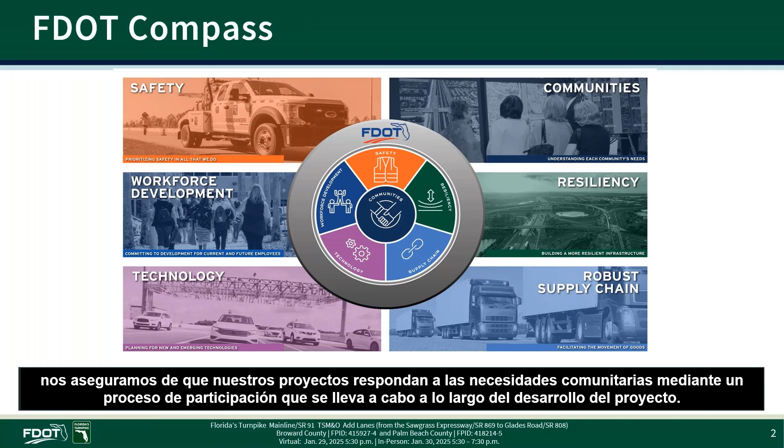This project is being developed in accordance with the Civil Rights Act of 1964. Under Title VI of the Civil Rights Act, public participation is solicited without regard to race, color, national origin, age, sex, religion, disability, or family status. If you have any questions or concerns, please contact Desiree Stills at 407-264-3111 or Stefan Kolakowski at 850-414-4742.

This meeting will provide you with an opportunity to review project details, ask questions, and provide comments concerning the project. In this presentation, we will discuss the following: the project location, project development process, proposed design, construction, project schedule, and submitting questions or comments.

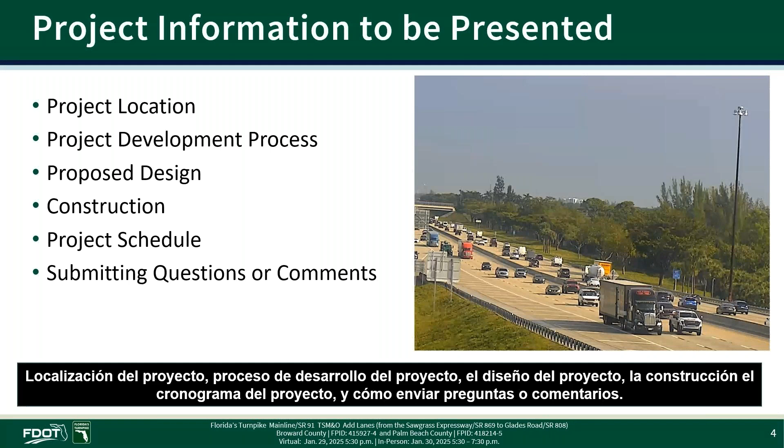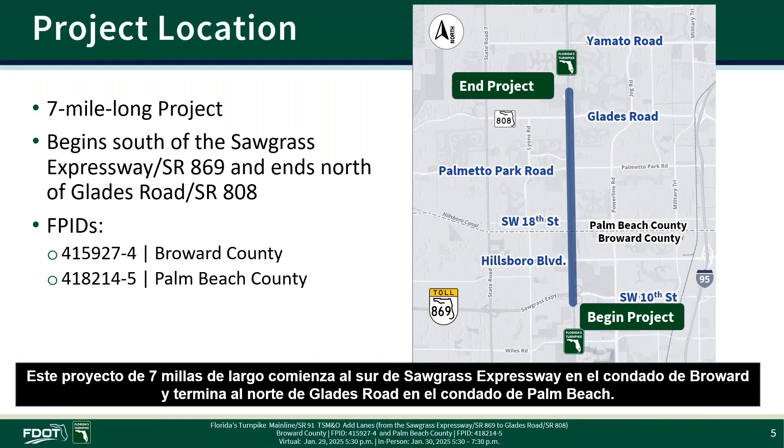This 7-mile-long project begins just south of the Sawgrass Expressway in Broward County and ends north of Glades Road in Palm Beach County. Florida's Turnpike Enterprise has assigned a financial project ID number for each county: 415927-4 for Broward County and 418214-5 for Palm Beach County.

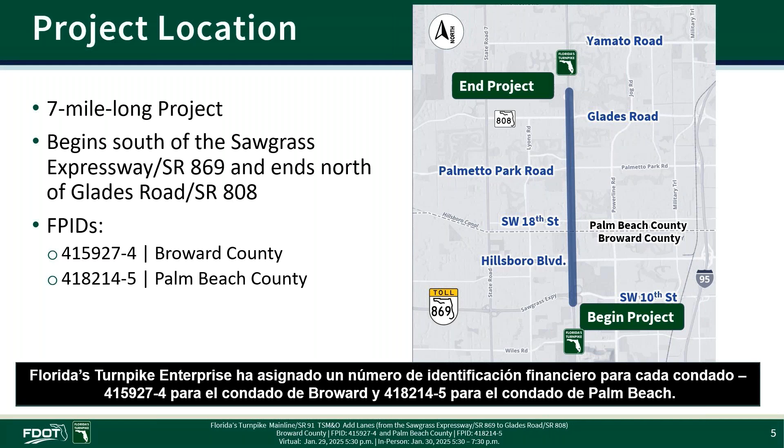This project is following the project development process. This process includes 5 phases, beginning with planning, project development and environment, or a PD&E study, final design, right-of-way acquisition, and finally, construction. The planning phase has been completed, as well as the PD&E study.

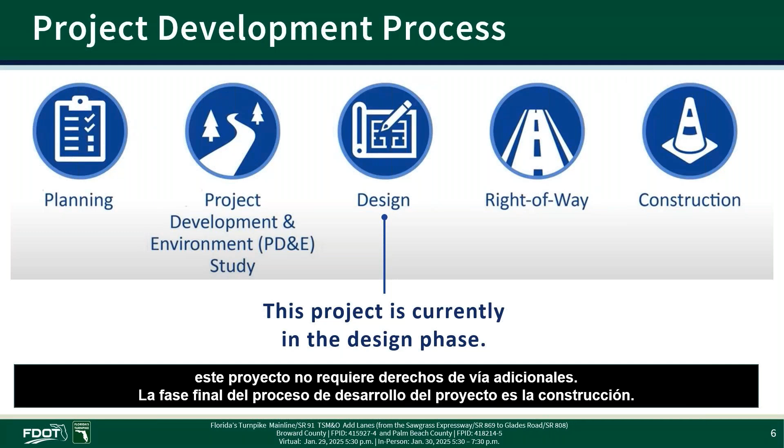Our project team is currently working to complete the design phase. The design phase is typically followed by right-of-way acquisition. However, this project requires no additional right-of-way. The final phase of the project development process is construction.

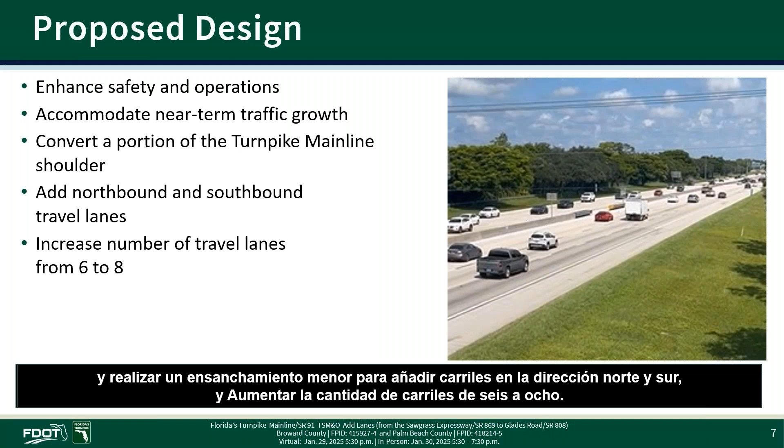The proposed project will enhance safety and operations, accommodate near-term traffic growth, convert a portion of the Turnpike Mainline shoulder to add northbound and southbound travel lanes, and increase the number of travel lanes from 6 to 8.

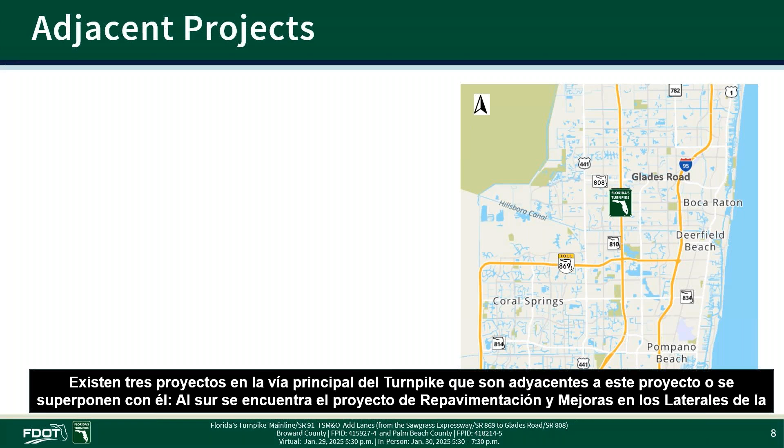There are 3 projects on the Turnpike Mainline that are adjacent to or overlap this project. To the south is the Turnpike Mainline Resurfacing and Roadside Improvements Project that is currently under construction, with limits from Pompano Beach Service Plaza to Sawgrass Expressway in Broward County.

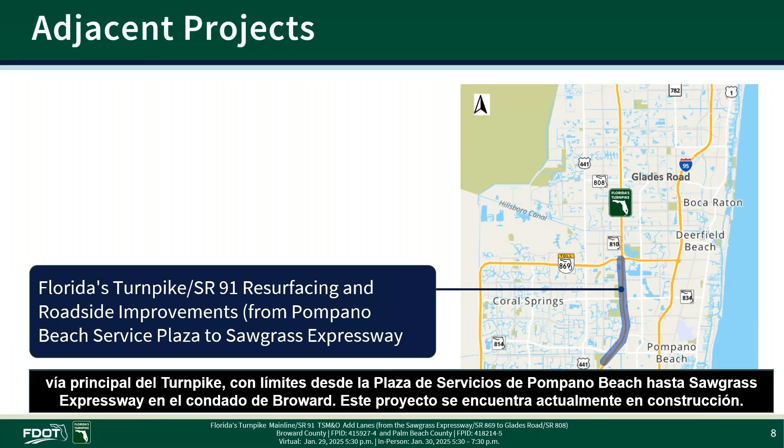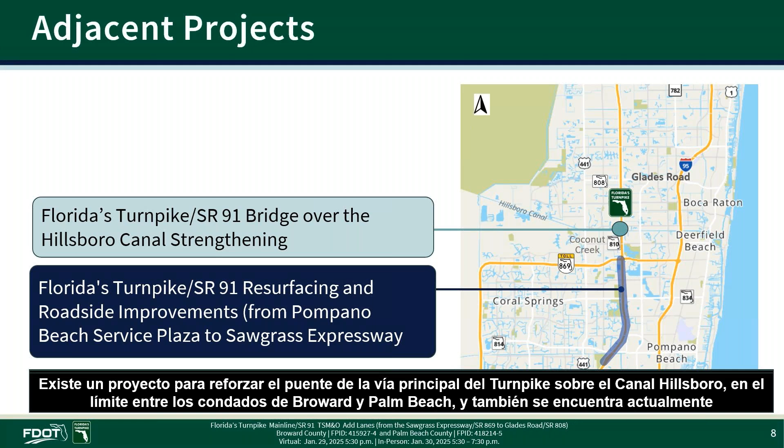A project to strengthen the Turnpike Mainline Bridge over the Hillsboro Canal at the Broward-Palm Beach County line is also currently under construction. And to the north, there is a project that is being designed to widen 3.5 miles of the Turnpike Mainline from north of Glades Road to the L-38 Canal in Palm Beach County.

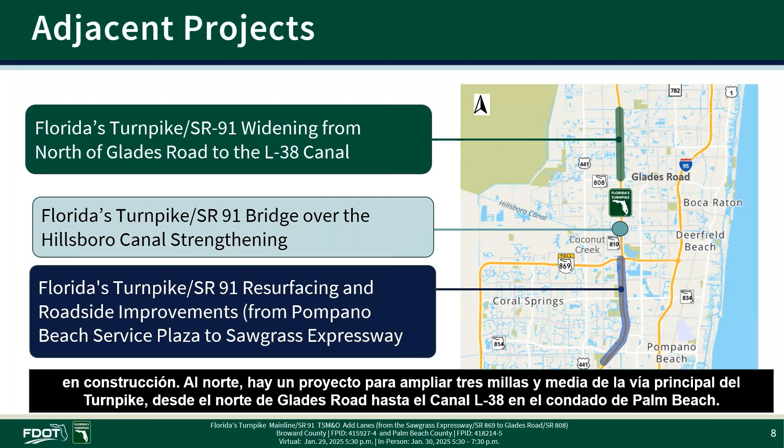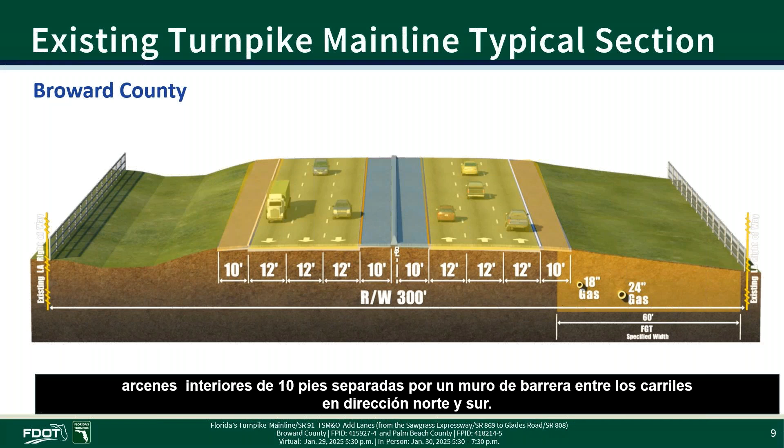Within the proposed project limits in Broward County, the existing Turnpike Mainline configuration consists of 6 12-foot travel lanes, 10-foot paved outside shoulders, and 10-foot inside shoulders with barrier wall separation between the northbound and southbound travel lanes. The Florida Gas Transmission, or FGT, has an easement running along the northbound right-of-way that includes 2 natural gas transmission pipelines.

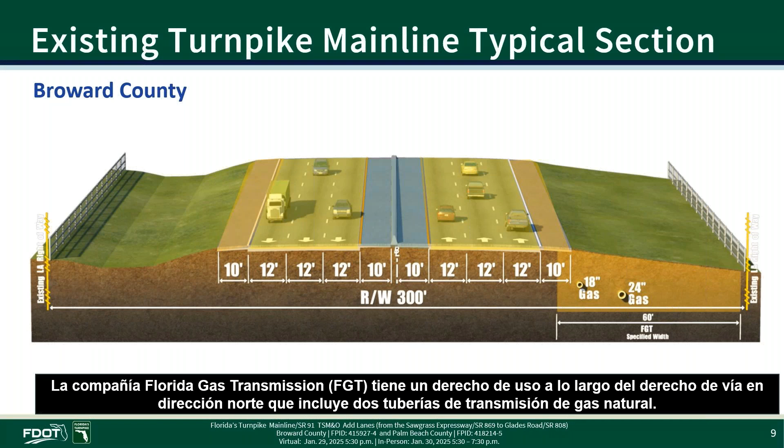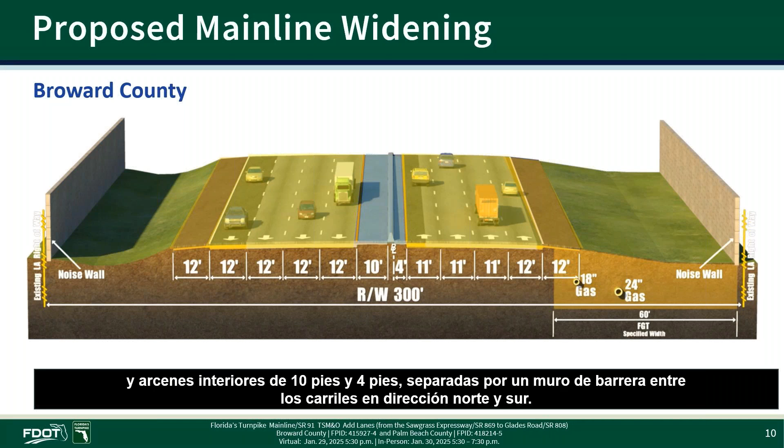The proposed configuration widens the Turnpike Mainline to the west and will consist of 8 lanes in total: 4 12-foot travel lanes on the southbound side, 3 11-foot and 1 12-foot travel lanes on the northbound side, along with 12-foot outside shoulders and 10-foot and 4-foot inside shoulders with a barrier wall separation between the northbound and southbound travel lanes.

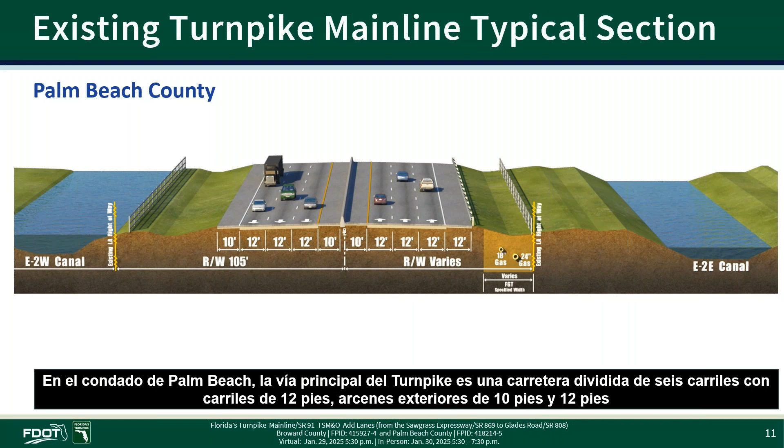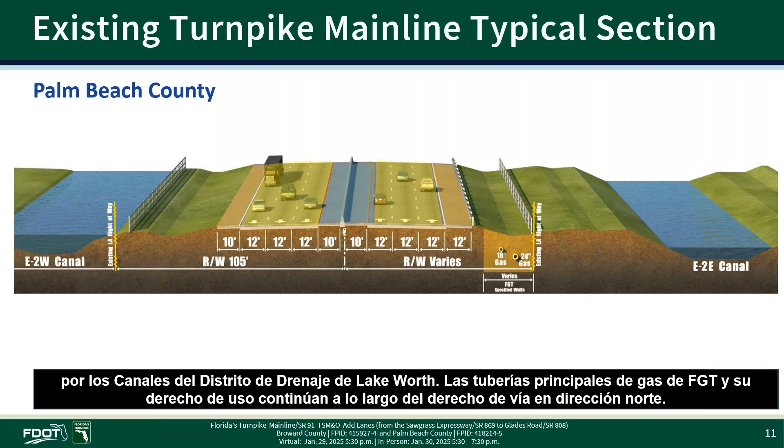In Palm Beach County, the existing Turnpike Mainline is a 6-lane divided roadway with 12-foot travel lanes, 10-foot and 12-foot outside shoulders, and 10-foot inside shoulders with barrier wall separation between the northbound and southbound travel lanes. This section is bound on the east and west by Lake Worth Drainage District canals. FGT's gas mains and easement continue along the northbound right-of-way.

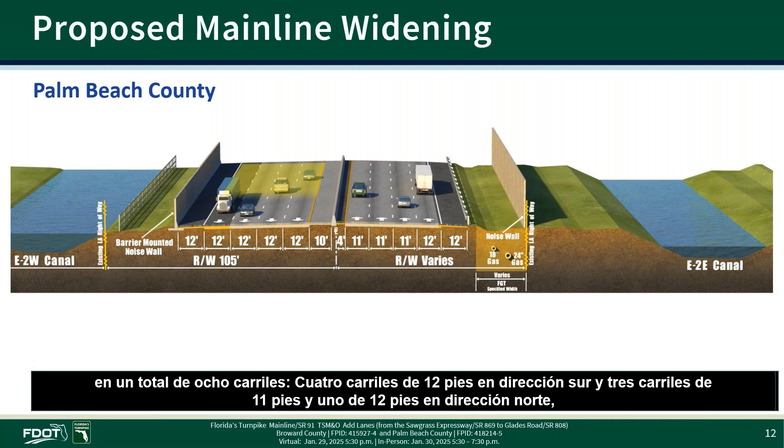Like the Broward County section, the proposed Turnpike Mainline configuration in Palm Beach County widens to the west and will consist of 8 lanes in total, 4 12-foot travel lanes on the southbound side and 3 11-foot, with 1 12-foot travel lane on the northbound side, along with 12-foot outside shoulders and 10-foot and 4-foot inside shoulders with a barrier wall separation between the northbound and southbound travel lanes.

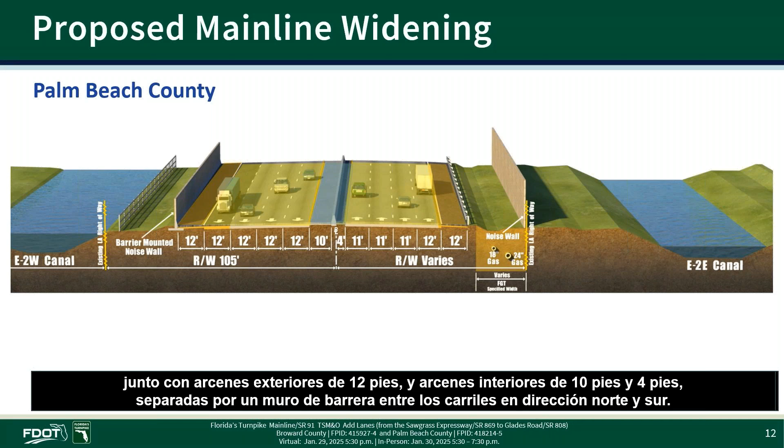In addition to widening the Turnpike Mainline, noise walls will be installed in most areas within the project limits. All noise assessments are carried out in accordance with Florida Department of Transportation policy, which is based on federal and state regulations. For walls to be included in the design plans, they must meet FDOT acoustical criteria and must be constructible.

The proposed noise wall locations from the project noise study are available to view on the aerial boards at the in-person meeting, on the project website, and on the following slides. For more information regarding the noise wall evaluation process and approach, please view the Enterprise's traffic noise video online at floridasturnpike.com or by scanning the QR code on the screen.

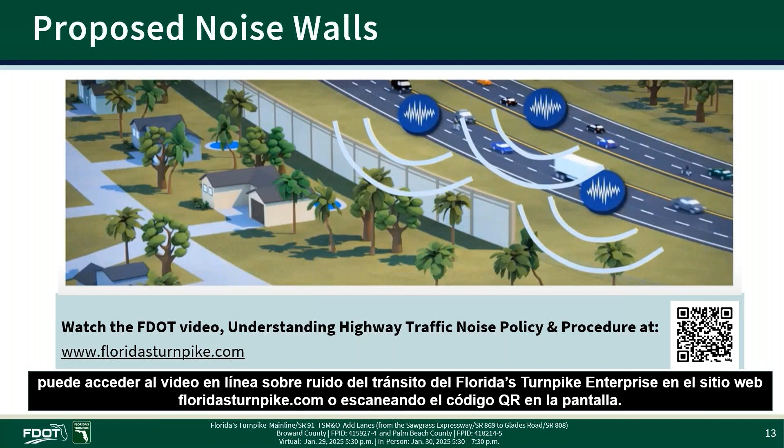This exhibit and the following slides are aerial views of the project, with north to the right and the proposed noise walls illustrated in magenta. Starting from the southern end of the project in Broward County, at the Sawgrass Expressway, and working north, noise walls are proposed along the southbound Turnpike Mainline from the Sawgrass Expressway ramp to about 600 feet north of Hillsborough Boulevard. Along the northbound Turnpike Mainline, noise walls are proposed from Hillsborough Boulevard to the Broward-Palm Beach County line.

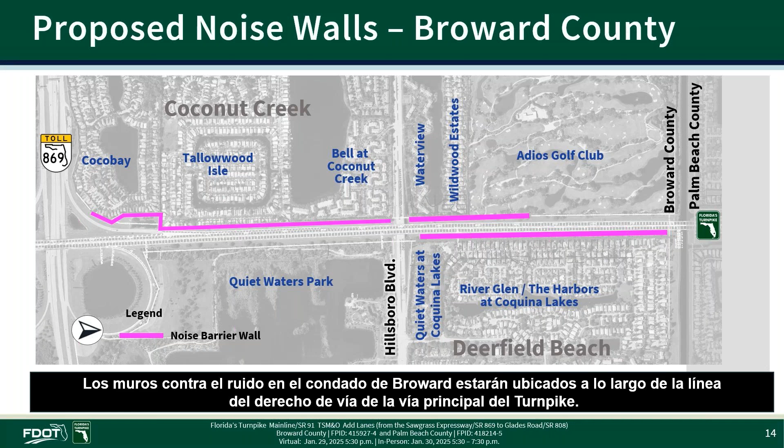Noise walls in Broward County will be along the Turnpike right-of-way line. Continuing north into Palm Beach County, along the southbound Turnpike Mainline, noise walls are proposed from the Broward-Palm Beach County line to south of Palmetto Park Road. Along the northbound Turnpike Mainline, noise walls are proposed from the county line to Palmetto Park Road.

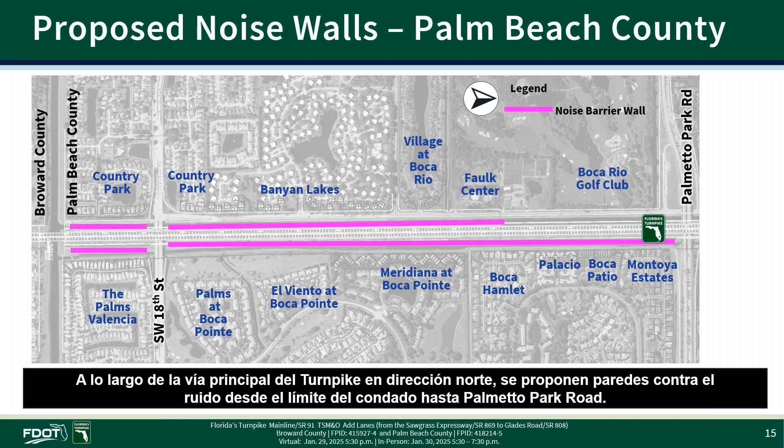North of Palmetto Park Road, along the southbound Turnpike Mainline, noise walls are proposed at 2 locations as shown on this slide. Along the northbound Turnpike Mainline, noise walls are proposed from north of Palmetto Park Road to about 1,100 feet south of Glades Road.

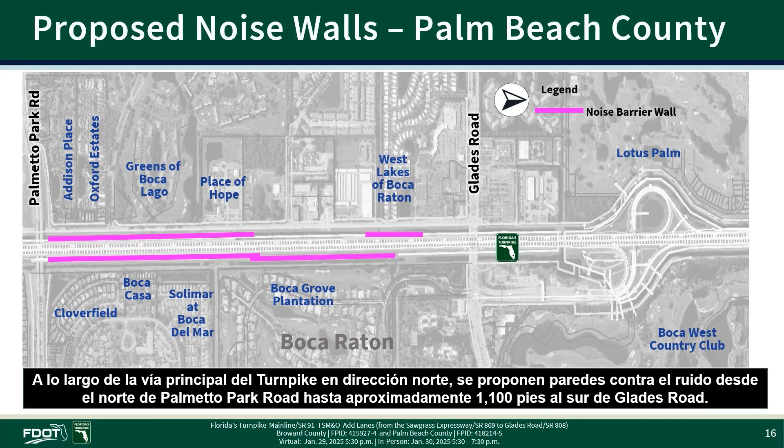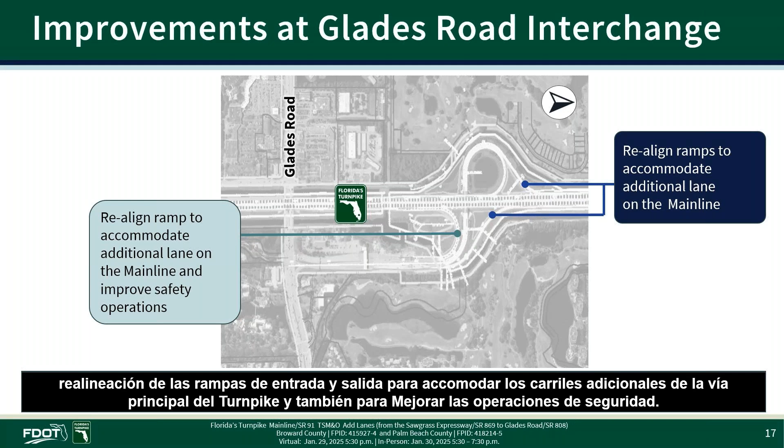In addition to noise walls, there are improvements at the Glades Road interchange that include realignment of the on and off ramps to accommodate the additional lanes on the Turnpike main line and to also improve safety operations.

In addition to the proposed roadway improvements and noise walls, safety improvements include an upgrade to the existing wrong-way vehicle detection systems. The wrong-way vehicle detection systems on roadways owned and operated by the Florida's Turnpike Enterprise are an integral part of a statewide effort to enhance driver safety.

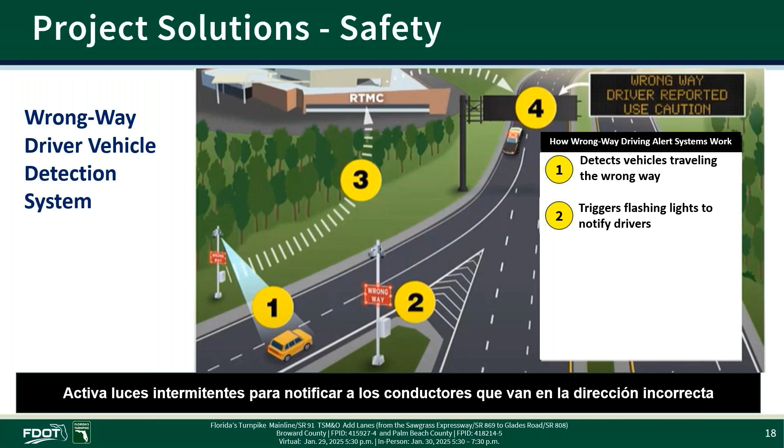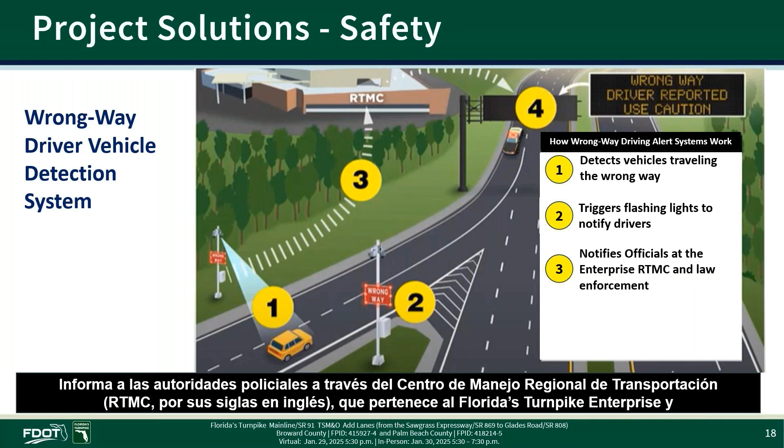The system detects vehicles traveling the wrong way on exit ramps using radar technology, triggers flashing lights to notify drivers traveling in the wrong direction, notifies law enforcement through the Enterprise's Regional Transportation Management Center, or RTMC, and alerts drivers by broadcasting a wrong-way driver advisory on electronic message boards.

When the project reaches the construction phase, signage will be placed to inform drivers of lane closures and traffic diversions before work begins. The project team will continue coordinating with local agencies, businesses, and the public during construction.

Safety is a top priority during construction. The work zones within these phases are set up to protect the workers and the traveling public while minimizing changes to traffic patterns. The construction of this project along the Turnpike main line will be implemented in phases. Travel lanes will remain open during peak periods, with occasional nighttime lane closures and detours.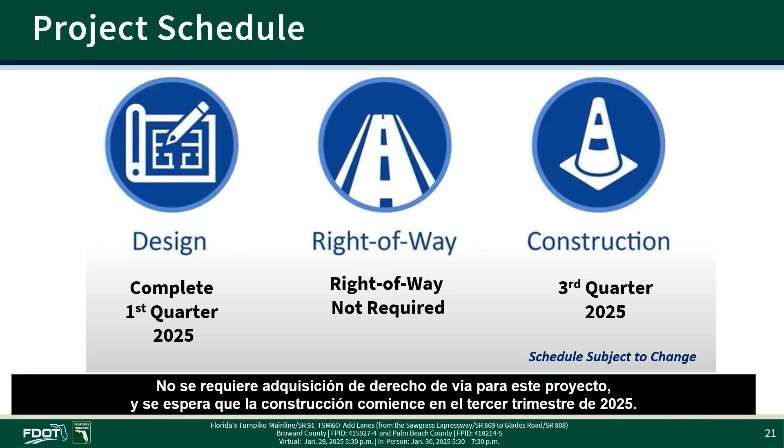Based on the current project schedule, the design will be completed in the first quarter of 2025. Right-of-way is not required for this project, and construction is expected to begin in the third quarter of 2025.

Your comments are essential to this process and will help the Florida's Turnpike Enterprise understand your concerns and suggestions for improvements. If you have questions or comments, you may mail or email your comments after the public meeting to Paul Naranjo or the Community Outreach Specialist, Daniel Jimenez. We would appreciate your written comments by February 10th, 2025.

To view the documents presented at tonight's meeting, find more information on this project, or submit questions online, please visit the project website at www.turnpikesawgrass2glades.com or scan the on-screen QR code now.

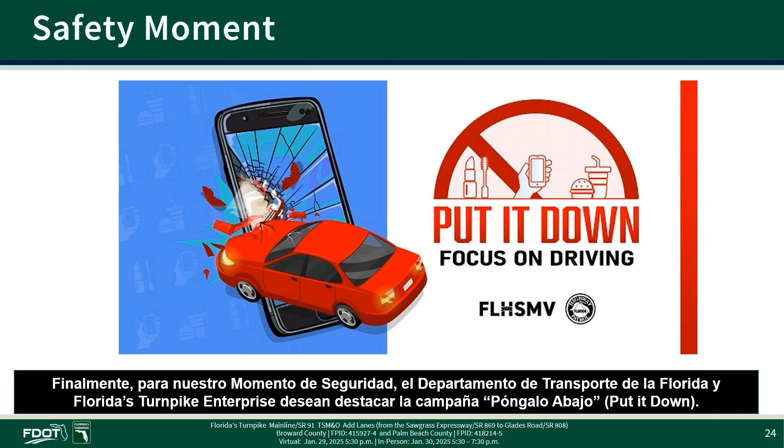Finally, for our safety moment, the Florida Department of Transportation Florida's Turnpike Enterprise would like to highlight our Put It Down campaign. This campaign aims to raise awareness about the dangers of distracted driving and promote responsible behaviors among drivers. We want to remind all drivers to keep your eyes on the road and focus on driving to ensure everyone can arrive alive.

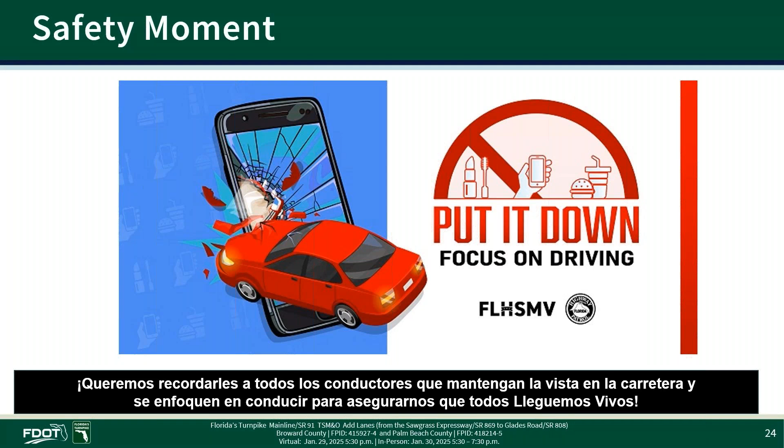This concludes the Design Public Information Meeting video for the Florida's Turnpike Mainline, State Road 91, TSM&O Add Lanes project with limits from the Sawgrass Expressway to Glades Road. On behalf of the Florida Department of Transportation and Florida's Turnpike Enterprise, I hope you found the project video informative. At this time, we will now enter the frequently asked questions portion of our meeting.

Question: where can I find more information regarding these projects? For more information about the project, please visit the project website at www.turnpikesawgrass2glades.com or scan the QR code shown on the screen. Scroll to the Documents section to view detailed exhibits. A recording of this Design Public Information meeting will also be available on the project website.

The same information will be shared at the in-person meeting on Thursday, January the 30th at 5:30 p.m. at the Sugar Sands Park Community Center located at 300 South Military Trail, Boca Raton, Florida 33486.

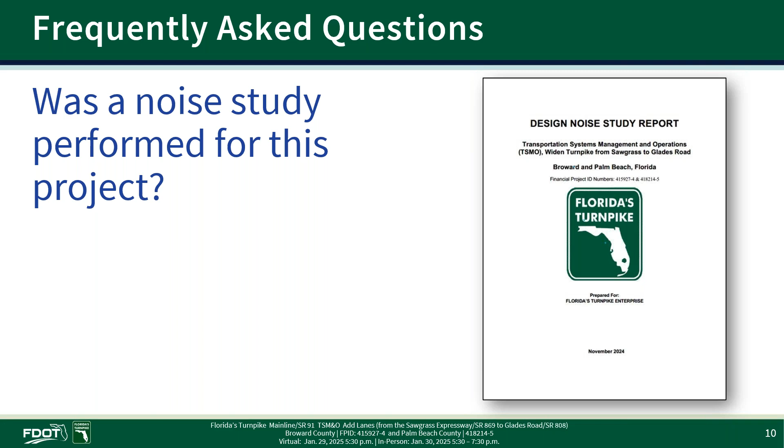Next question. Where can I find more detailed information about the noise walls? You may find more information by visiting www.turnpikesawgrass2glades.com. The aerial maps from this presentation can be downloaded from the website. They will also be on display boards at the in-person meeting.

Next question. When will construction begin and how long will it take? Construction is anticipated to begin in the third quarter of 2025. The exact construction time has not been determined, but a project of this size generally takes between 3 and 4 years to complete.